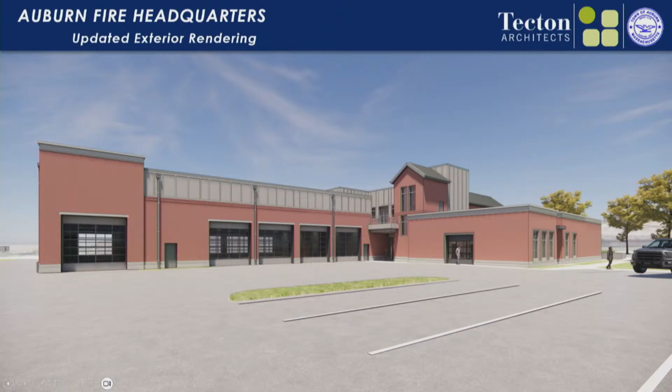So we have 8 different options to go through. Some of them are just different colors and things like that. We had talked last meeting about just doing the back of the building, but when we started looking at it, it made sense to think about the apparatus bay as a mass, as something that we should maybe treat the front and back separately. We could certainly keep it brick and change it just in the back, but we wanted to show you the front elevation as well, just so you can consider that.

So this is looking at basically a simple replacement of the brick area in the apparatus bays on what I'm going to call the lower masses. So we've got a couple of 3 tower elements related to the bays, this piece over the radio room, and then the corners at the mechanics bay. In some options, we kept those towers. In other options, we made it just sort of one continuous elevation that wraps the bays.

So this one looks at taking the brick on the lower portion of it and replacing it with a gray ground face CMU, and then leaving the panels up above. This was what we had initially rendered as the fiber cement panels as a board and batten. This could also be achieved with the insulated metal panel as well.

And this is a view as we come around the back, repeating the same detailing here at the rear of the apparatus bays. This is that tower at the mechanics bay, front and back, and then there's the field in between it that we would also suggest keeping that same language and replacing it with the ground face CMU. You can see back here the simpler mass of the stair tower. It used to be kind of up here, so now we've brought that down about 12 feet.

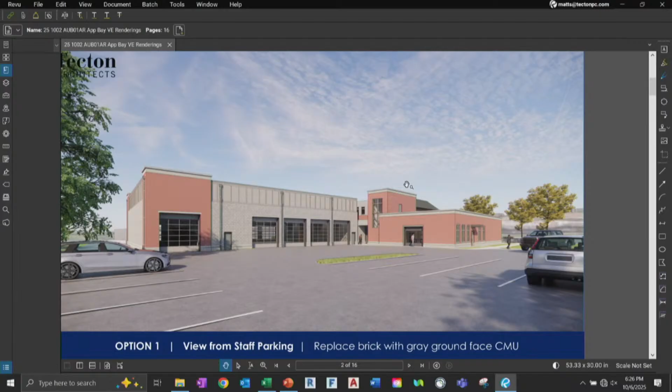Option 2, same concept. This is just looking at, instead of a gray ground face block, this is more of a red tone.

Going past this with the brick. So the idea with this one is going to a lower cost option from the brick, but still keeping something that's somewhat complementary to the brick. So that's why I kind of want to pass it around with brick, the physical brick samples themselves.

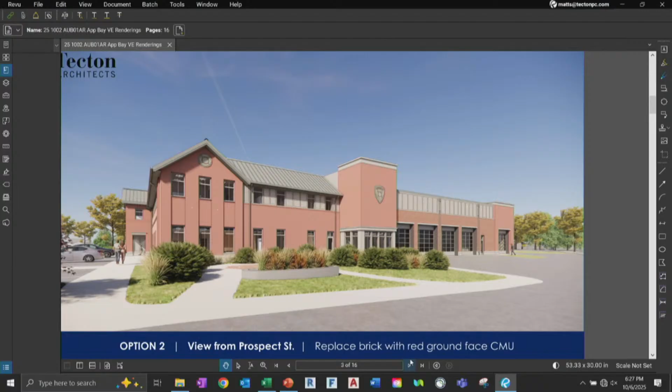So Matt, just to be clear, you're saying brick would be throughout the whole front of the building besides where the apparatus is, that's where that. Correct. So the pinker, right here and right here, would stay the brick, and then the field in between them would go to the ground face in the red. And then again, as we come around to the back, same concept.

Option 3, this is looking at the insulated metal panel. So this is, again, the same concept, keeping the tower elements as they are, and then going with a fairly simplified insulated metal panel. These things come like between 2'6" and 42 inches wide, and the economy of them is getting a single run all the way up. So you're increasing a little bit of cost in the material, cost per square foot for the material is a little bit more expensive, but you're saving a ton of cost and time on site. So this is looking at full height, running them all the way up to the top of the parapet in this concept.

And then here it is around the back, and again, the return along the mechanics bay, doing it there as well.

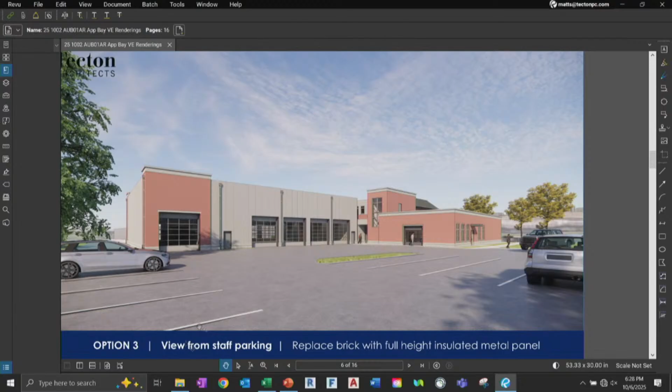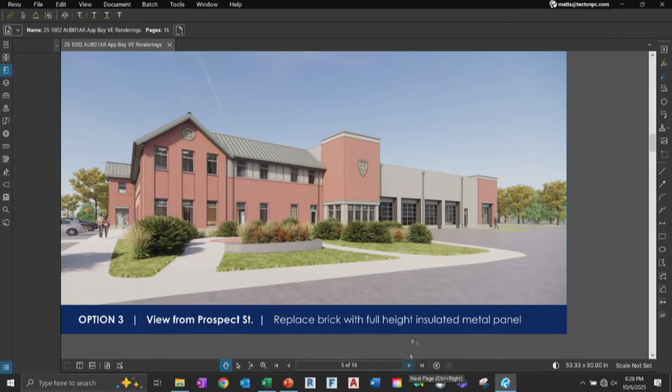Can you go back one, please? Yeah, just not a fan of changing the materials on the outside corner, on that far tower by the mechanics bay. So you got the gray, it goes from gray to the reddish on the outside corner. I think it would look nicer if the red returns to the inside. That's a straight— oh, okay, never mind. Returns on the north side, yeah, yeah, that's it.

Through the chair, how do those panels attach to the structure, and how resilient are they to rust and deterioration over time? It's a pre-finished, Kynar finished aluminum, so they won't rust. The Kynar finish is like an anodized or powder coated finish, so it's pretty robust. It lasts quite a while, and because it's aluminum, it won't rust.

No, it oxidizes. If exposed to salt and things like that, we wouldn't run them all the way down to the ground. So we'd have a ground face block or a split face block or precast concrete base, like 2'8", 2'10", and then do the metal panels with a water table up above, so they're not impacted as much. For their attachment, there's basically a clip system on the back that attaches to a Z-girt, a metal channel that attaches back to the structure, and they just clip them and hang them on.

Or they're actually a tongue and groove that tie into each other. The one that goes on first, then you have fasteners, concealed fasteners that go into those Z-girts, and then the next one comes in over top of it with the sealant and everything else, and it's all hidden.

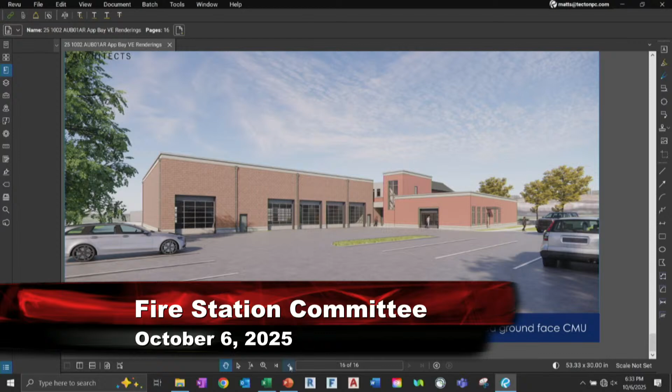Any comments? That's all the options I have. Any comments or questions? Anything resonate with anybody?

Through the chair, Matt, these are only options if we are looking to reduce the cost potentially, and not—I mean, we could put it out to bid as the project was already warranted, because we do believe it's going to come in under bid, under budget. With that, we don't have to pick something now.

You don't, I would say. It's prudent to always protect yourself against the gamble when you're bidding. So I wouldn't suggest a prudent approach being, let's go with the assumption that we're going to get favorable bids that are well under budget.

I think we should continually look at ways to improve the budget or protect it as we develop estimates and receive those. We've got our first gut check estimate that we just ran, and that was off of a really early set of drawings and specifications. We're going to have a more robust one going to our estimators next Friday. I don't think we need to sit here and say, let's cut and slash, but I think we should start considering where the prudent trimmings may be as we further refine those estimates.

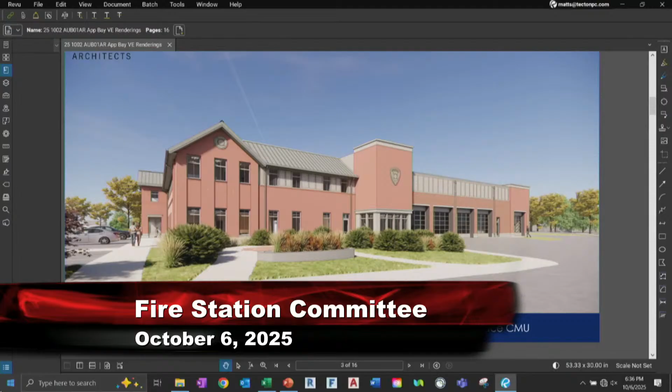Do we have to pick one option when we go out to bid, or can we go out with alternates in the bid? If we went down the alternate route, say we're between this one and this one, that's reasonable—here's a metal, here's a brick, let's look at the two. But when we get into an alternate where the tower elements go away or not, that's a lot more complicated. We're dealing with many different trades impacted by that, and that complexity leads to poor alternate pricing.

So what I was looking at is we have option 0, which is brick all the way around as originally designed. Can we then have an option 1, one of these, that if we want to include it, we could get bids on both? If we do it all brick, it's this cost; if we do it with metal panel or whatever we decide, it's this other cost—can that happen at bid time, or do we have to pick one?

I think some of this we'll have to pick earlier, because if you go brick and then go to metal panel, you have very different backup systems—that's a whole other set of drawings. Joe was explaining at the last meeting that as we get to the DD sets, we'll be refining and pulling the budget in tighter, so we should have a better understanding. Right now they're getting a feel for the options we could pursue and get values on.

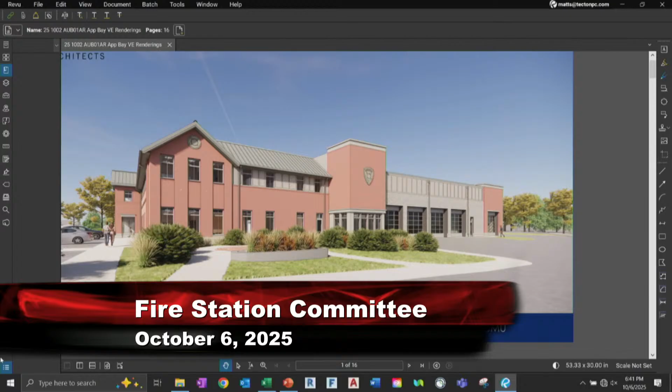The one he's showing right now, that's understood. Were you saying black along with the metal panels, or just throwing out another color? I know you're not a fan of trying to color match with the red. I don't know what choices are available to complement the brick.

The darker ones, the grays, the dark grays, the blacks in the ground face, they look really nice installed. I'm not opposed to saving something without making a lot of major concessions. Going with an alternate material in that space is the logical way to do it. I do like the detail of leaving the tower, the top of the bays, some sort of vertical element like that. It matches well with the windows on the other side, gives the tower contrast too, which is nice.

Can you go to the next view that shows the side and the rear? On the left side here, would that be the gray block as well? Right there, yes, it matches this detail. I think it would look better if what's on the door side carries around for all three sides. That kind of anchors that side rather than having the material change yet again on the end, so keep that brick. You're saying keep that on the left side? The back tower, the mechanics bay tower, I think is what he's talking about.

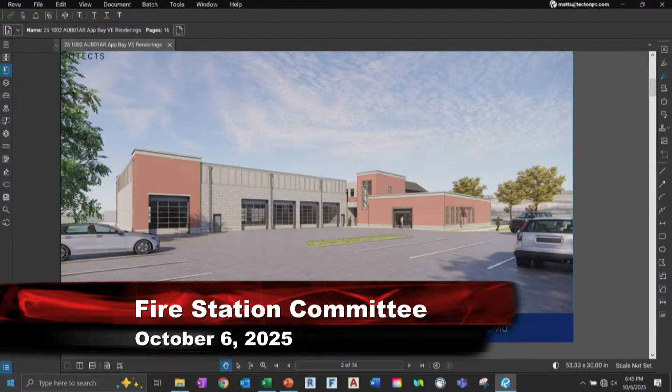On the site plan, where does that face? That's north, right? So it's facing toward the parking lot, or toward Veterans Park. And that's your driveway coming around. It's going to be shielded by the park and the trees there, and it's your main driveway in and out for employees, fuel trucks, propane trucks, and everybody.

I don't think it's going to be that shielded. There's a roadway, and then your back sitting area—you're sitting so far off Prospect Street to begin with, for the apparatus apron, so you can swing in and turn around and come. It's sitting back a lot further than you think. You can't really see the site from Prospect.

From Southbridge Street, because you're going to be behind the Dunkin'—that's what the Dunkin's reference means. How close to the drive-through, how far back is that? And the park is up on a knoll too. So as you're driving down Prospect from Southbridge Street, there's a rise in the earth that's going to be shielding that. Plus you're a lot further back than a normal building would be on the facing of the street.

The only reason I ask—outside the scope of this project—is I've seen brick murals done as memorials or features, and it would have to be fundraised. I don't know if that facing gives you any worthwhile place to put a mural or something, since you are facing the park to some degree. That's just what was crossing my mind, it doesn't have to be—obviously it's outside the scope of this project. But if the apparatus bay side and the doors are that masonry color, and then you have the brick at the tower, and the ground face block all the way down the side, it ties together.

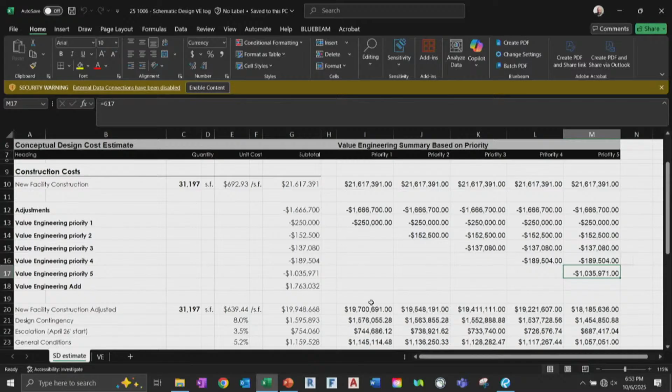Now, based on the estimate, if we go all the way through priority 5, excluding the adds, it puts us $1.5 million to $2 million under budget, give or take. So that allows us some wiggle room. Again, we don't need to wholesale say let's make cuts today - this is just so we can start establishing the priority. This is us getting the conversation going, and it's a continual process as we continue to build out the project.

That makes sense? Yep. All right. Anybody else have questions? Speaking on behalf of everyone - sorry. Makes sense to me.

So the first four here are adds. I just wanted to start getting round numbers in people's heads for some of these things. So one thing we did is there were some conversations earlier on about the HVAC system.

We were looking at, as the most robust system, going with an electric heat pump. But we wanted to protect the budget, so we did a gas-fired boiler for the heating system. And we had our estimator provide an alternative cost to go with an electric heat pump system. That add was $884,000 to go to a heat pump. I think he's high on that number, on that assumption. We're going to continue to refine that, but it's a big number.

The next one below that was looking at changing the metal panel cladding - changing the fiber cement board and detailing that we have along that top band and around the backside of the building to metal panel. My estimator gave us a cost of $376,000 for that add to go from fiber cement to metal panel. He told me the cost per square foot he was carrying for that was between $85 and $110 per square foot. I know you don't believe him on that.

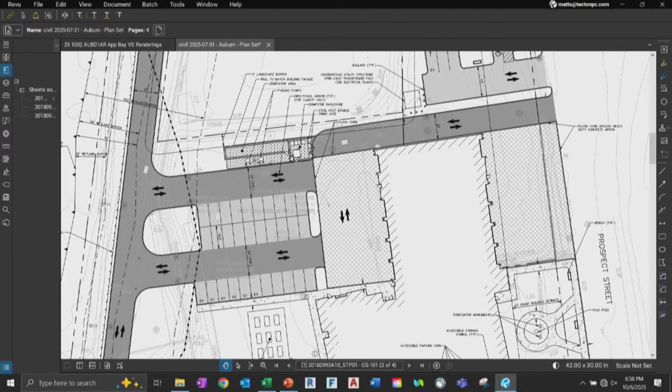What's the long-term maintenance difference, having it buried versus not? It would be easier to replace one that's not buried than one that is. I think a lot of us have probably experienced having to get a buried oil tank out of our yard and the costs associated with that.

You don't have the same environmental concerns, but it's certainly more troublesome if something happened, like a valve blew out in the wintertime, and you've got to take it out of frozen soil. That's a challenge, but if it's above ground and something happens, you have to replace the tank, it's disconnect it, pull it out, put a new one in.

I assume it weathers more above ground though than it would buried? Yeah, but it shouldn't. You shouldn't have an issue with it for quite a long time.

At West Street, in the last 20 years, we've had to excavate those tanks twice for various problems. So my opinion is if we have a utility space in that strip that allows us to keep them above ground and they're out of the way, I'm not opposed to that.

I think those tanks will have to be replaced during the life of this station, so maybe even twice. If we can keep them above ground and they're fenced in and secured, I think to save that $100,000 value, that's kind of the easy choice.

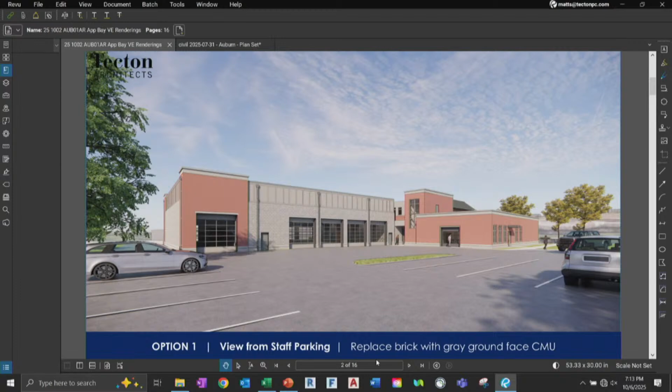I can say, what do you think would be the appropriate aesthetic, and cut him loose, and Tyler can run around the building and think about some options. Because to be honest, it'd be a drastic change, but I could see it looking really sharp. The brick there was the ground face block too, and so you sort of define this hierarchy where the more prominent elements are brick, and the elements that step back become the ground face.

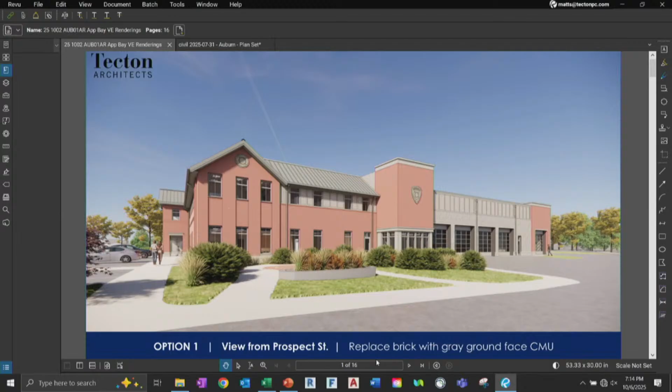Yeah, I think it's important to anchor each side of the ground face, so you've got the towers, and on the back, as long as you were able to anchor between the door and the corner of the fitness center somehow, then I think if it just went gray all the way to the corner, it would look kind of boring, even puzzling. I don't want puzzling to describe one of my buildings.

The next one down is looking at the same as the rear, from the ground face to the insulated metal panels. My estimator is telling me it's an increase of $123,000. I'm not buying that. I think it's a refinement in the specifications to refine that number down, but it doesn't sound like that look is something we're pursuing at this time anyway.

The next line item is an adjustment, reducing the building size by 928 square feet. When we started schematic design, we took the front of the building and squeezed it up 5 feet, realizing square footage savings without affecting the program. We did the same on the right side along Prospect Street, bringing it in another 5 feet without affecting the program. We reorganized the administrative and living quarters upstairs slightly. I think it works out better for you guys, to be honest. So this was free money, $670,000 in reduction there.

The next one is one that you didn't like so much. We can save 212 square feet by taking 2 feet out of the apparatus bays. My question is, what does that do? Does that take an 8-foot walkway down to a 6-foot walkway, or a 6-foot walkway down to a 4-foot? Leave the doors open and bring the trucks in.

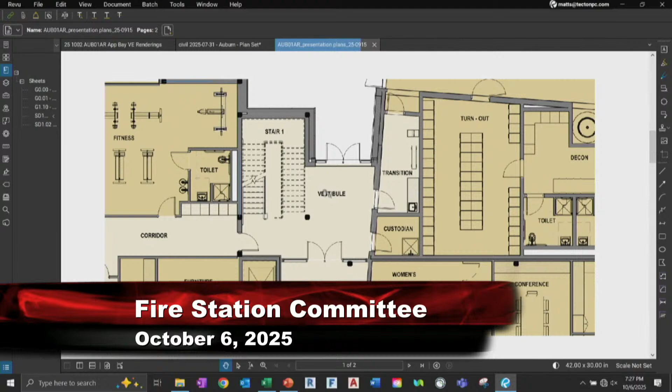I don't think I have the most recent floor plan here, it's from July. So you're saying instead of using this as a vestibule, because that's a wide open stair, you got one door as you're coming through from the outside that the employees are coming through from the parking lot, and you're letting all the cold in during the wintertime, and it's sucking right upstairs, so you're right up to the lobby upstairs. Yeah, we can make a vestibule, a traditional vestibule here. That's fine.

I was just thinking that because that's a non-public part of the building past that set of doors that are in the middle there, that stairwell does not need to be anything fancy. It's kind of a vestige, a leftover from when we had fire department offices plus the 911 call center upstairs. We know we can simplify that whole thing down, it's not a big deal. I would think that might help some. I would just leave the square footage for the flooring, I don't think it's gonna save us any square footage.

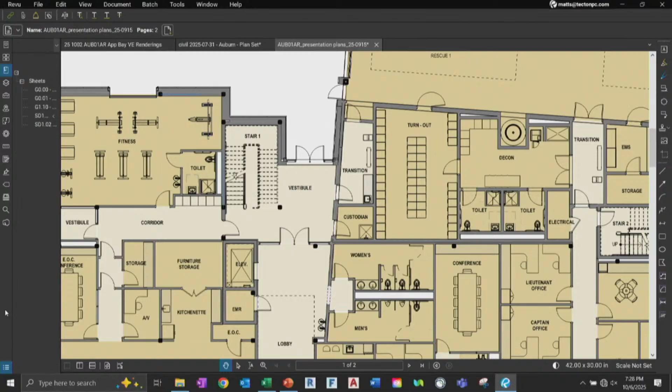I'm just asking, with efficiency, you're saying for efficiency and for heat and all that, that would benefit it. Well, putting the vestibule in and stuff, I would think would certainly help it. I was thinking that the stair goes from being drywall and painted to a CMU block painted like the other stair, so material-wise you're cutting costs down that way, but it doesn't have to be enclosed. I was also thinking that when you did that, you could put a roof ladder at the top of the stair to get up to a hatch, so your ship's ladder is not necessarily outside, but inside to get you up through a roof hatch or something, as an alternate.

Yeah, I guess you could do that. Well, no, the other stair goes up too high, I think. Oh, maybe it doesn't, probably the same height. You could probably do it in the other stair that way anyway.

Either a ship's ladder or an alternating step ladder, like the Lapeyre stairs or whatever, get you up to a roof. But you're already on it about downgrading the terrazzo tile to a quartz tile or something. So that's part of what I was looking at and thinking about.

That space on the employee entrance is non-public but high traffic, I think is how I would probably look at it, because that's where they're all going to enter and leave as employees, as well as transition to the fitness area.

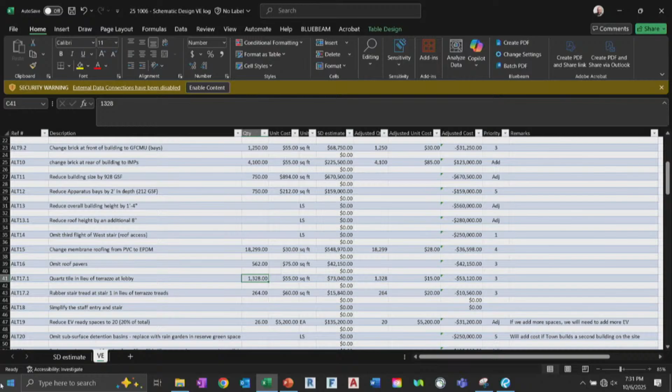Both the quartz tile and the terrazzo, you're probably going to want to run a machine over that once a day. You're probably going to want to clean it regularly, just like any floor finish in a building like this, and that would be the public side.

What would be the materials back on those entryways that you just showed us? Are those going to be like a rubberized floor, or what would that be? Right now, we're doing a recessed walk-off mat system. So when you go into some stores, it's got the grates that you walk over with a walk-off carpeting, so that really gets the grit and everything off, and then it goes underneath that into basically like a tray, and then once a month you pull that out, vacuum it, and you're done.

But the rest of the floors, like in front of the fitness areas and to the stairwells, what are those floors going to be? It depends. The fitness area will have fitness flooring, like a rubber flooring. I see that more in the hallways and the white areas there. So right here, this would be the walk-off mat, and then this we're talking about is terrazzo or the quartz tile. The transition zones are also walk-off mat.

It helps decontaminate the bottom of your boots as you're coming out of the dirty side of the building to the clean side. Coming off that side entrance where the parking lot is, that would be walk-off too. No, this would all be the rubber tile, and then this would all be fitness flooring. Got it, okay. Again, that was my point - there would be a difference between what the public would be on compared to what the employees are on daily.

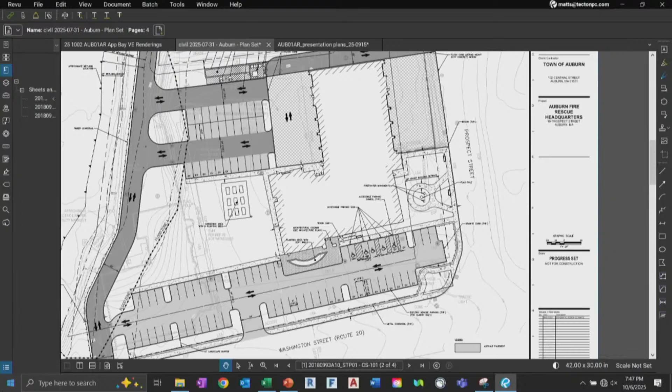One option we have is we could do a surface mounted detention basin - so this is a big rain garden. And here, we're preserving some green space for a potential future hypothetical building that may or may not happen.

If that building ever gets built, obviously they'll have to take that detention basin out and tie in a sort of site-wide subsurface detention system. So there'll be some cost associated with that future hypothetical project. But if it never comes to fruition, we buried our infrastructure here just to preserve that potential future use.

So I'm suggesting saving quite a bit of money in site development costs by taking part of this green space and creating a large rain garden that will serve this purpose. Then 20, 30, 40 years down the road, if that other building gets built, it's just part of that project that has to get managed to take that system out and put a new one in.

Matt, what else is out there? I don't know if there's anything on the commercial side for parking lots that self-drain, not asphalt. Like pervious paving and all that? Right, yeah, that's all part of the same thing. It doesn't really help you on the back. I wouldn't put pervious paving anywhere a fire truck is going to be driving, it'll tear the crap out of that thing pretty quick. I'm just thinking other technologies besides big buckets underground that are catching water and then just releasing it.

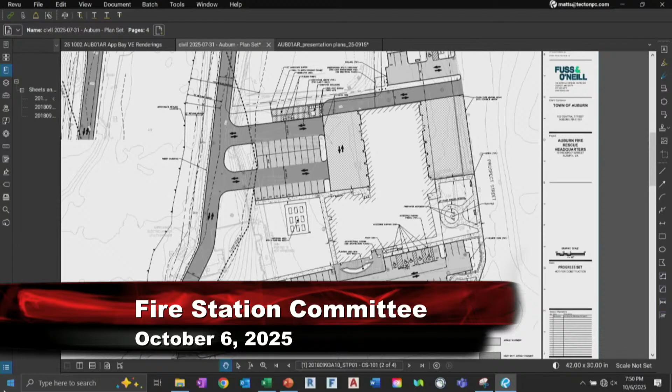Is that what was on the side building at Lexington? Yeah. Because I'll be honest, aesthetically that was tough to look at. Not picking on them, but this would be a lot easier to maintain in the middle of the site. It was very overgrown, and they kind of complained about it. You'd have to put a fountain in it or something.

You've got to maintain it. There's a series of very large ones at the Shrewsbury PD - there's two right to the right of the front entrance, and a massive one on the left side of the staff entrance. If you want to go see those, we designed those. Lexington's was a traditional detention basin, very basic - we used the old granite curbs removed from the old building to create baffles to help with water filtration. Shrewsbury's were more modern rain gardens, with specific plantings. They look fairly attractive, there's educational signage that goes along with it. I think you might want to look at those before you throw out the whole idea.

I get the optics of the whole thing, so it's an option. Right now our biggest bust is on site costs. I'm just saying, I hope we never get that far down the list that we're having to really consider that.

Okay, so I'll leave it as a 5. One other one we got here - we initially designed the entire building perimeter where it's metal stud framing as 8-inch deep metal studs. A lot of the perimeter structural steel is 6-inch tube sections, so it's a 6-inch by 6-inch square column. They have a little bit of movement to them, so we can't bury them in a 6-inch stud wall - they'll be in our drywall, in our sheathing. But we could save $125,000 by reducing that to a 6-inch stud.

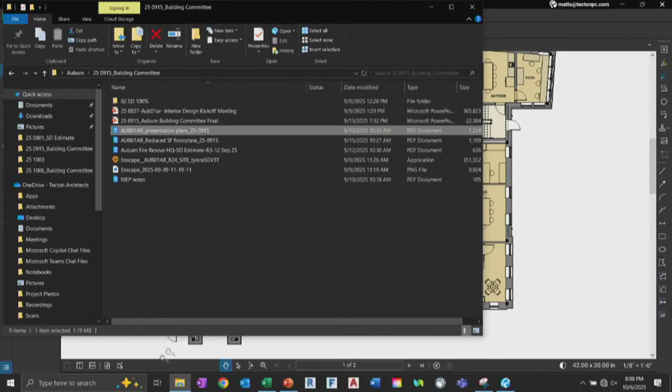Why do I feel like the design of that corner changed upstairs? It has, yeah. This is - when we put the second ridge in, they brought it out proud to make it stand out in the design. I was at the Tecton meeting last week, and I feel like - there we go. This is the latest. I don't remember, is that the latest? This is the latest. Okay, so it still has that. Yeah, we can pull it back. I don't know if it's going to save us any money.

I think it'd be a more comfortable space because you don't have a cold floor. I was doing it in conjunction with filling in the lobby space, and you'd add some offices along there that we didn't have before. This layout is changed - you kind of swung the dining and kitchen around and everything else. Yeah.

So what is the reason that one bunk hangs out like that and it couldn't be pushed to be even with the other bunks? It could. Would they lose the windows? No, I think you could have it back and you could have a 2-story entrance with the gable on it, with the peaked roof coming out to the end there.

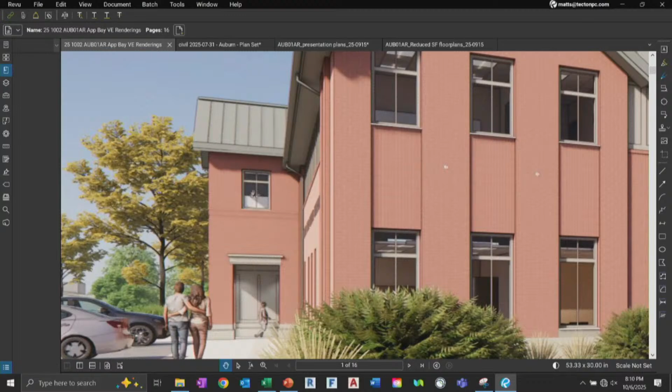Because if you go to your elevations - I mean your elevation drawings, not your renderings - it doesn't show up on your renderings. It's right there, but if you look from the Route 20 side, bring up the elevations on your drawings. Although you might have the walk-around rendering too. Oh, that's the back.

No, not a sitting room, but I think otherwise you just lose a bunch of space if you push the bunk room forward - you have wasted space behind it. I'd rather see the bunk room stay where it is.

Yeah, it's just going to be a catch-all. That's what I was more worried about. I was kind of doing it with getting rid of the opening to the lobby, and then allowing you to reconfigure the living space some better too, and add some other space - office space or study room space that we had originally but took out of the scheme.

I'm not saying it's important in the grand scheme of things. Part of the open lobby too was if they ever did utilize building on the second floor of the training center, that would give you another source of natural light. Like I said, it could be 20, 30 years from now - I didn't say it was. It could be, the second floor could be just part of the other building, not anything to do with the fire station, if you have separate uses or whatever. I mean, that's what I'm saying - you could spend a lot of money up there and never use it, so it's like, why are we doing it, I didn't say it was high on the list.

Well, this is supposed to be like the entrance, so you want it to stand out. Well, I know, but that's what I'm saying - so if right now that's a window to the bunk room, but if you take the brick header out of there and go right up through there, you'd have a 2-story entrance. You can hang a big fixture up in there, and that's your entrance - it would show up as a big entrance. Oh, you're saying make it clear top to bottom? Yeah, and just have columns coming up on it from the front side.

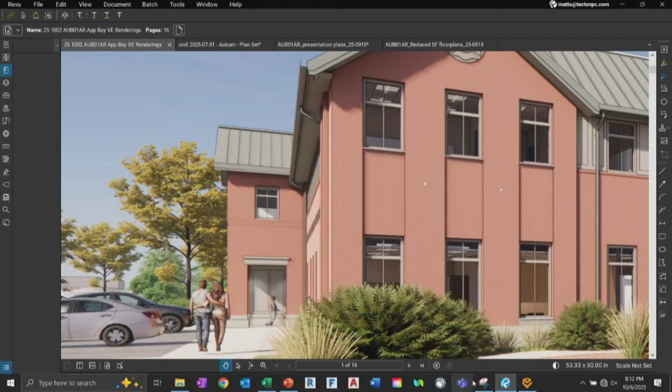You'd push the bunk room forward, take up that space that's kind of just wasted space inside. You'd still need the bunk window facing out - you would still look into the same space, yeah, but it'd just be back 10 feet, 12 feet. Whatever light is there, coming out, yeah. You'd turn the window and change the bulb.

I don't know, that didn't look like space that could be really used at the end of the hallway though. Sean, that is a consideration though, right? If that lobby, that foyer area is lit from above down into that. Well, you have that right now with the lobby, with the two-story lobby. You're going to have lights and stuff up there that you're going to have to get up to.

It's saying only for that officer's quarters, if he's pushed in, his exterior window now is that open space, which is going to be lit 24/7. But it doesn't necessarily have to be all the way at the top, it could be a lower fixture, lower because you're only lighting.

I don't know. Square footage wise though, even if we moved it in, say 4 feet, what is that really? 4 by 8? It's not going to do much because we're not changing the envelope. The thing we're going to save on is a little bit less slab.

Infilling this would increase cost. Yeah, we increase costs some, but I think you'd get more programmatic space for the actual living quarters, because you could take that - we got rid of study rooms or whatever a while ago, in your study and report rooms.

Well, the study room was a duplication of space because we provided that in each bunk room, that functionality. In the report writing, we moved that to the radio room because it was more functionally - it worked better for the way the department does that kind of thing.

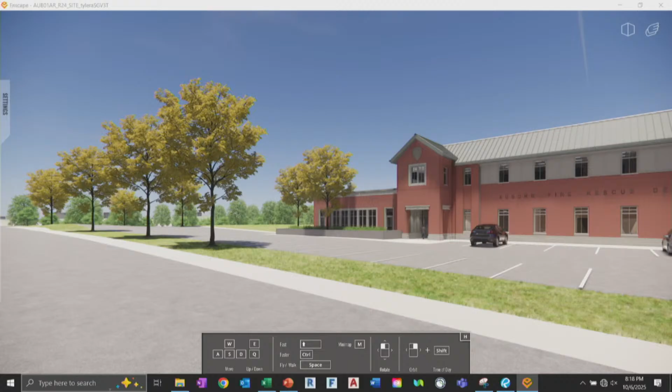I think the 2-story lobby also sits right over the entrance in the training center. Did you - the double door is pretty much right in front, near the elevator. If you get rid of the partition, you might be able to move your doors around too.

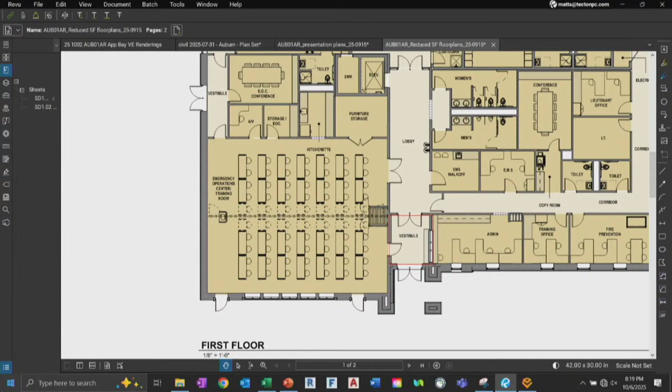You can't move it too far down. No, I guess you would move it closer to the front.

Anything else? That was my damage for now. I guess to weigh out the option of moving that forward or not, you're giving up some square footage where there's enough room to put something - a desk, a bookshelf. But would you put something right in front of a bunk? That's the question. You know, I assume it's more likely going to become a closet to put mannequins or fire brochures or something - nature abhors a vacuum, so it becomes a storage area for something.

The question is, is there a programmatic need?

Is that a window at the end of that corridor, out over that roof, future space? Yeah. So sliding these forward would kind of throw off the symmetry of that, right? Right now there's windows that come across here and here. If this bunk was - I'd have to play with it to see what makes the most sense. Could you slide the bunk to there and have the window with the door coming go straight to the end of the hallway?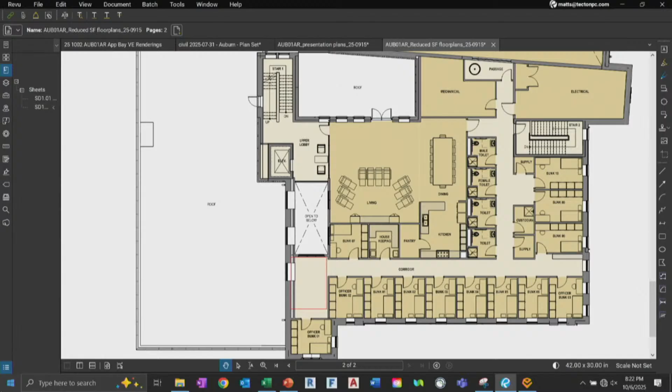I thought all of our discussions said that potential second floor was always future fire space, not public or other space - a separate building space. Well, it's separate, but we're kind of hamstrung with the flood thing, so in theory part of that second floor of the adjacent building could be over top of this building.

In theory - I'm just saying 20, 30 years from now, I don't know. The fire department may expand across there, and then that's a moot point, and you could use that window as a hallway going over there. But you're getting further and further away from the apparatus floor, so you've got a whole bunch of other problems. I think you'd be redoing everything.

What if that wasn't a bunk?

Would there be some other use for it? Well, you don't want to lose a bunk. I'd be leery on that. Right now with current staffing, it gives us flexibility of 6 bunks. So if we start losing bunks...

Or alternately, is it an alternate use until you need it as a bunk? Someday it could be a bunk, but don't put a bed in it right away. Use it as an office or a quiet space or a study room, especially since it's the least desirable spot because it's so far away. You could even make it bigger, though it depends who you ask about wanting to be further away. It would make a nice study space.

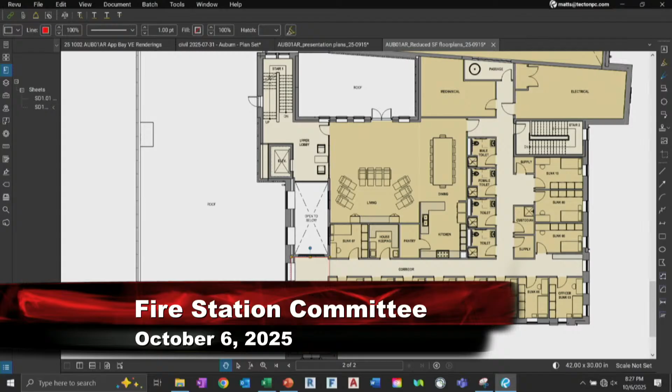All right, that's all I had today. That was a lot.

Connor? Yeah, so the advertisement went out for the pre-qualification process last week. Thank you, Chief, and everyone that helped out with that. The qualifications are due on the 22nd, giving them 3 weeks to get all their stuff into us through Bid Docs Online, which is a pretty good system we've been using in the past, and it makes it pretty fluent.

Check everything online. So once that comes in, Left Field will review some of that, and we'll contact the pre-qualification subcommittee separately via email to come up with some time to meet virtually, hopefully to run through some of the bidders that come through. We've already received quite a few, so people are very interested in the project, which is good news for us. We'll see what the final count is, but it's looking good so far.

Great, and that's it. We've been attending the design meetings, which have been very helpful. Thank you, Matt and team. Looking forward to Thursday's meeting - hopefully that will check some more boxes.